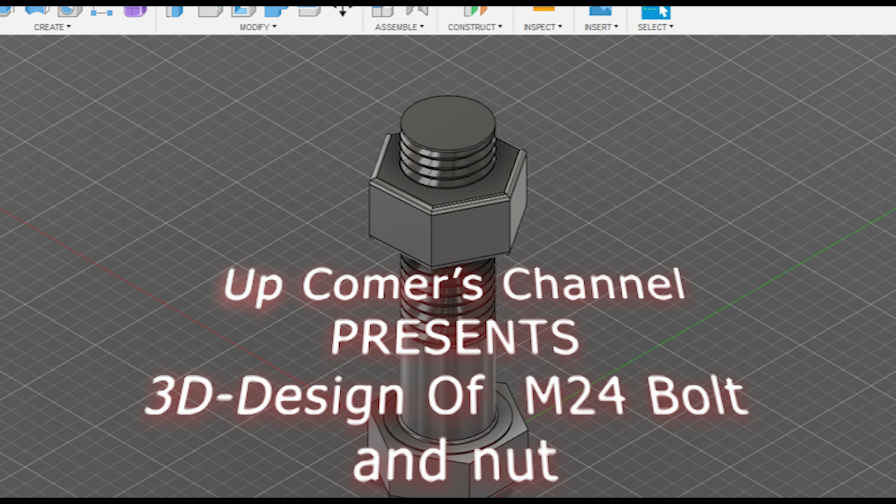Everyone, today we are going to design M24 bolt and nut. First open your Autodesk Fusion 360.

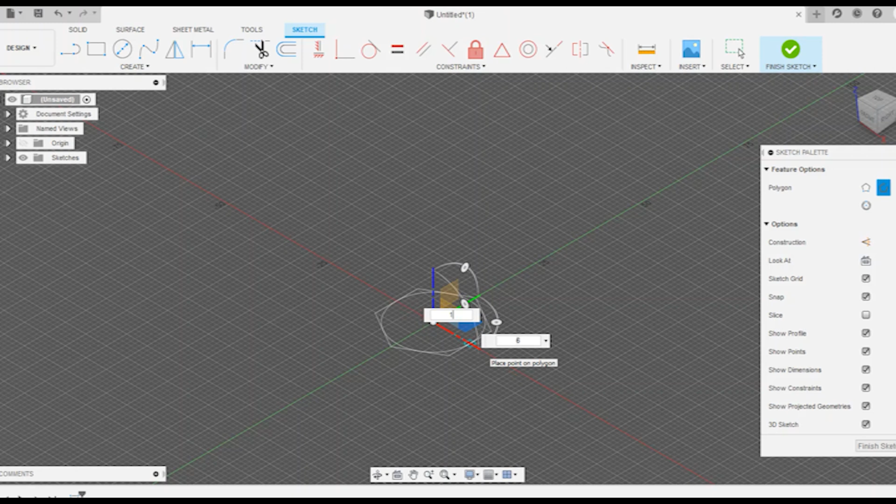Create sketch and click on create polygon, circumscribed polygon. Give radius around 18 mm so that it forms a diameter of 36 mm. Finish sketch and give extrude to around 15.22 mm.

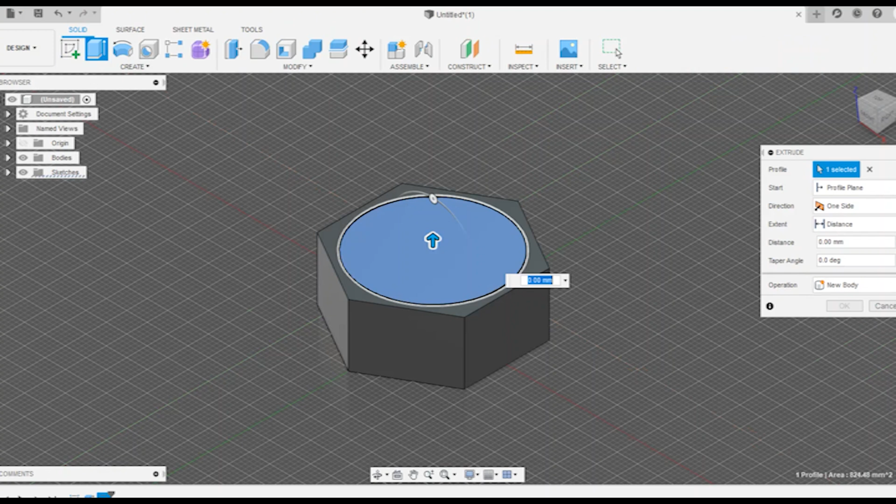Again select the upper plane and draw a circle of diameter around 32.4 mm. Then click on finish sketch and extrude it to around 0.5 mm.

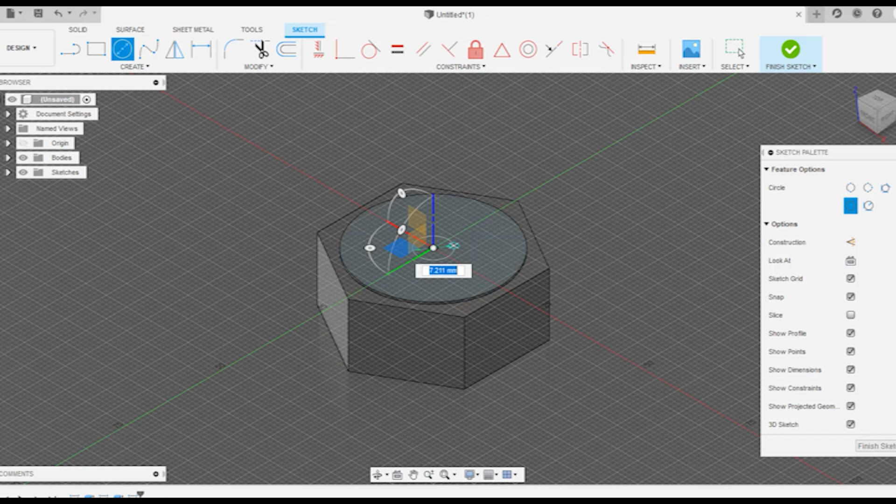Then click on the same plane and create sketch once again and click on the circle to draw the diameter of the shaft. The diameter of the shaft is going to be 24 mm. Just click on finish sketch and extrude again to the length, which can be given around 70 to 120 mm. I am choosing 90 mm here.

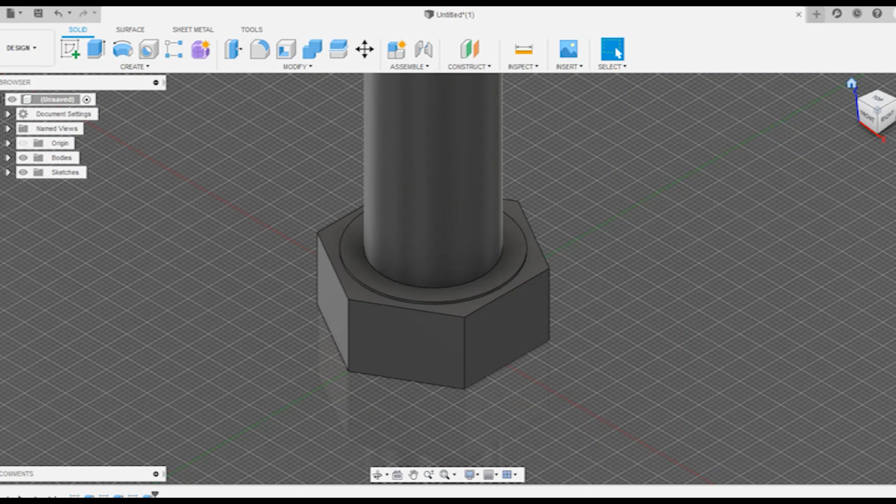We just try to extend the length. You can give any length, but it should be around 70 to 120 mm, not more than 120 mm. So I'm giving 90 mm. Then we're going to give thread to the shaft.

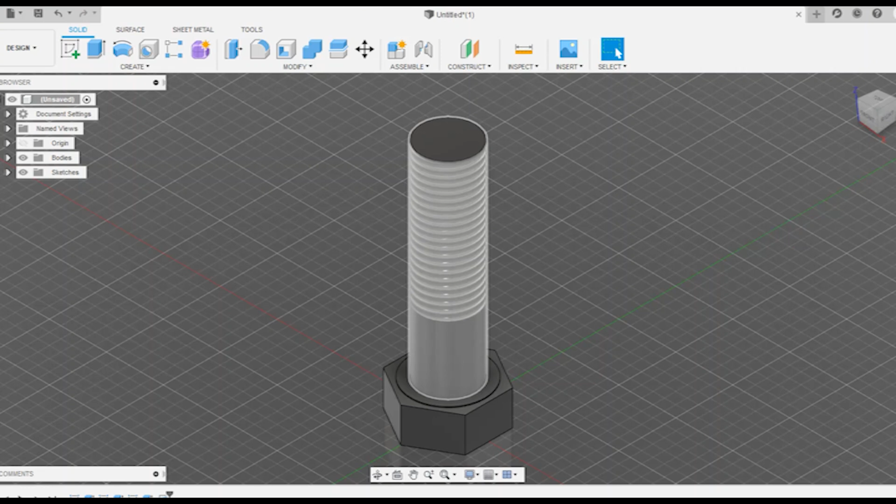It's not the full length we needed, so we just need a specific length, around 60 mm from the edge. Also we don't form the thread from the edge, so we are going to displace the thread around 0.75 mm from the base and click on OK.

I've just got a mistake, it's not completely formed a thread, so I'm once again going to form a thread. By this time you have to click on model and the same steps are going to be followed.

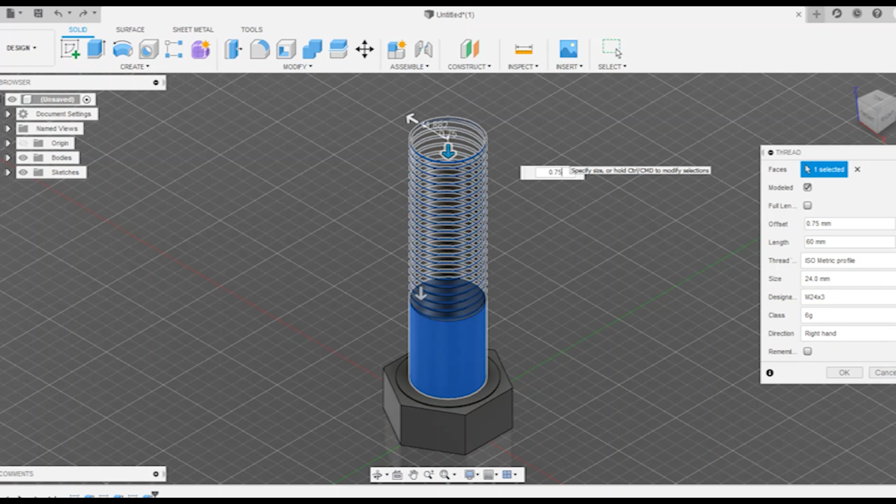Give the length around 60 mm and we are going to displace it to 0.75 mm from the base edge. Then click OK, so that we form the thread on the bolt.

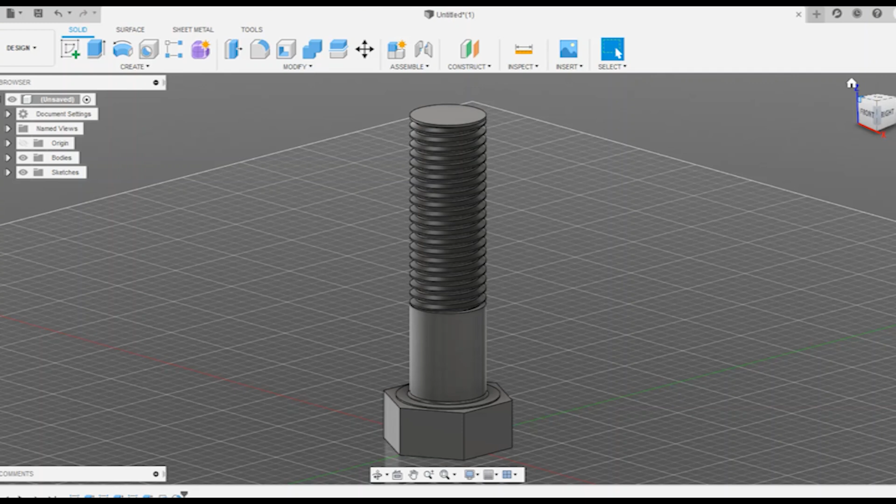Now we need to give some fillet radius to the length of the shaft at the place where we have created the circle. It's going to be 0.8 mm. Then click on OK to give it, and at the top face of the bolt we need to give a fillet radius.

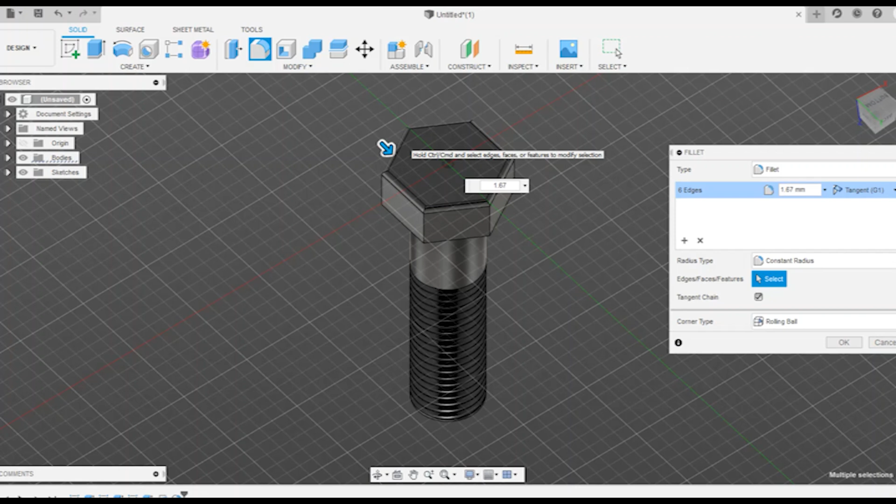So it's going to be around a 30-degree angle. After doing the math calculation, it will be around 1.67 mm fillet radius.

Now we can see that the bolt is just looking like a bolt. These type of bolts are lock nut bolts which is mainly used for assembly.

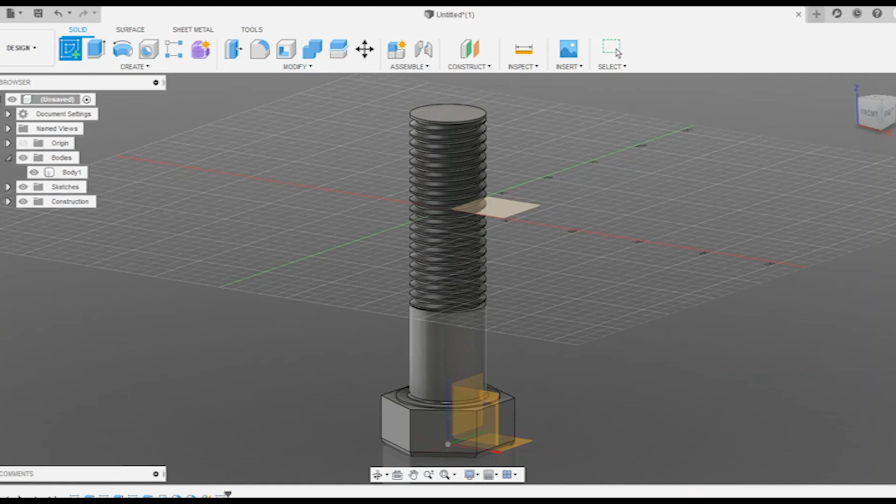Projects. Okay, now we are going to offset the plane to somewhere where you would like to place it, but we need to place that offset plane in the thread. Just the usual method: click on create sketch, choose the plane and draw another circumscribed polygon of the same diameter.

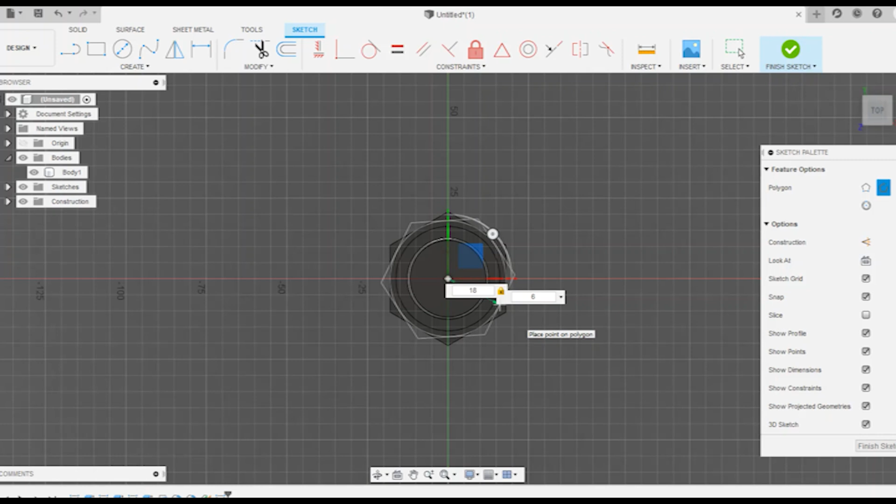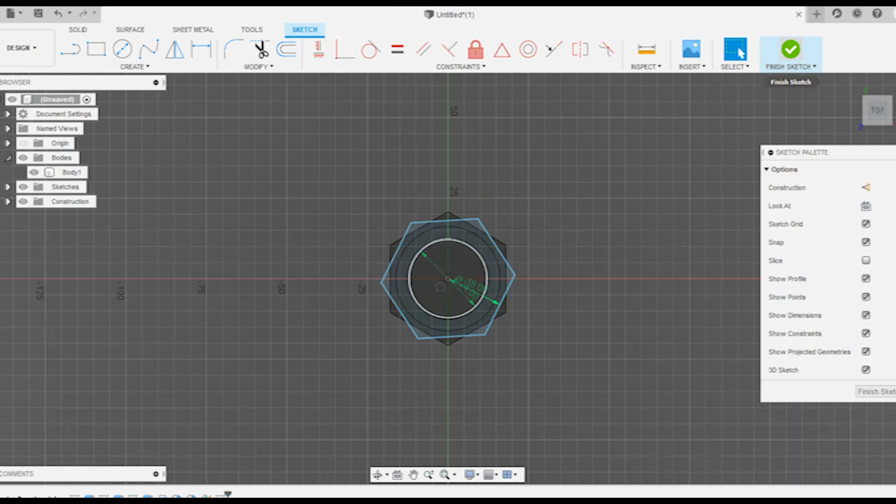So to form a diameter of 36 mm we are going to give 18 mm radius, click finish, click OK. Don't give finish sketch, go to circle and give the radius of the length of the shaft, which is 24 mm. Now you can click finish sketch.

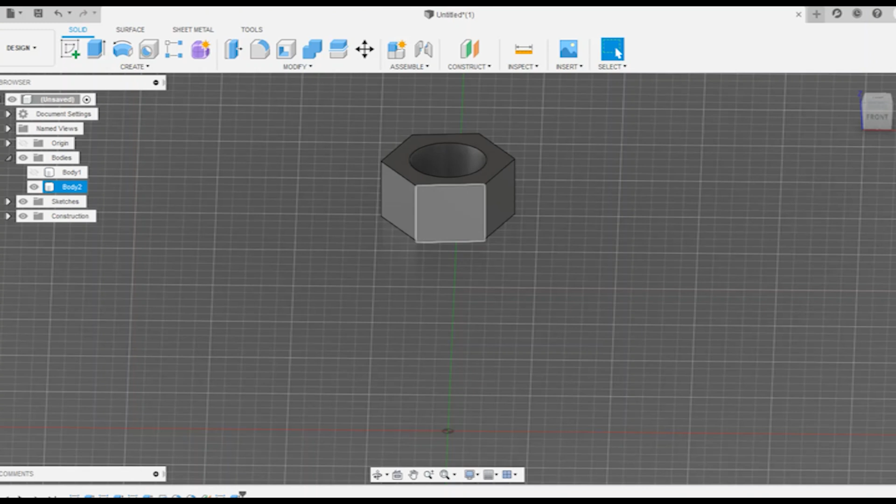It automatically intersects and forms the remaining parts so that you can easily extrude. It's going to be around 19 mm, which is just a nut. If it's going to be a lock nut, then its length is going to be 10 mm only.

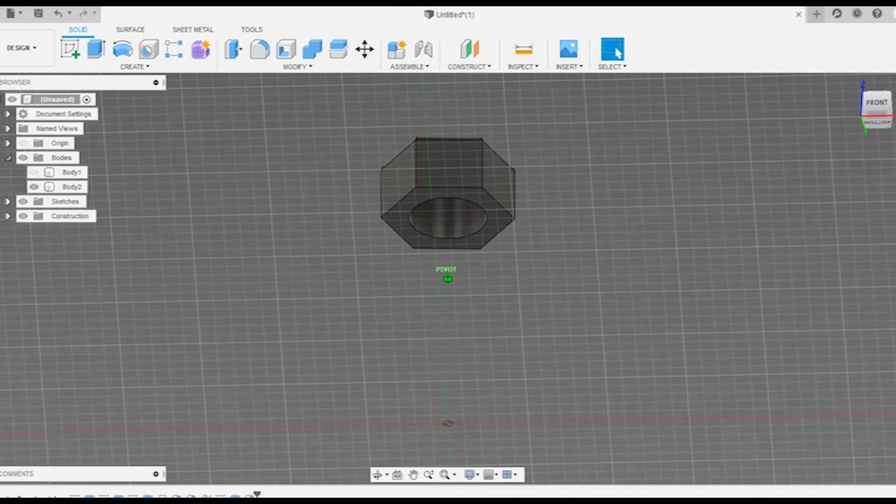We are going to select the edges to give a fillet of around 1.67 mm. On both edges we are going to give the fillet radius.

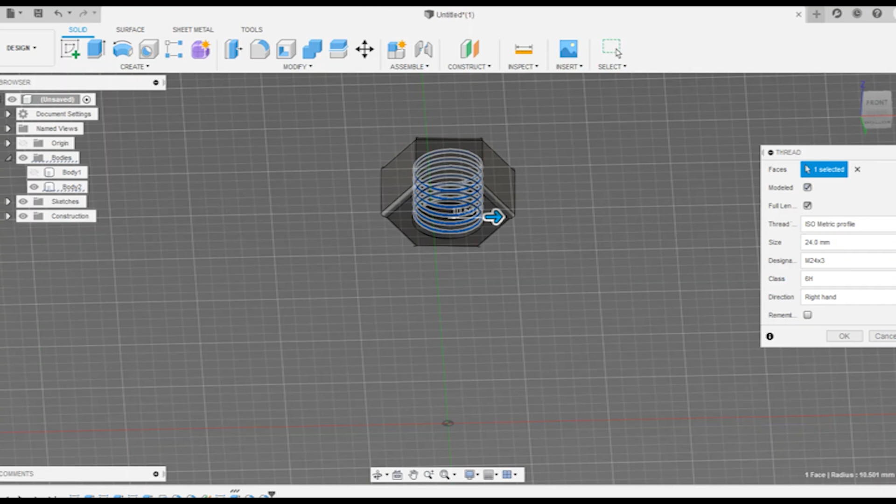We are going to now give thread to the nut. Just click on modeled and click OK. Now the thread has been created in the model.

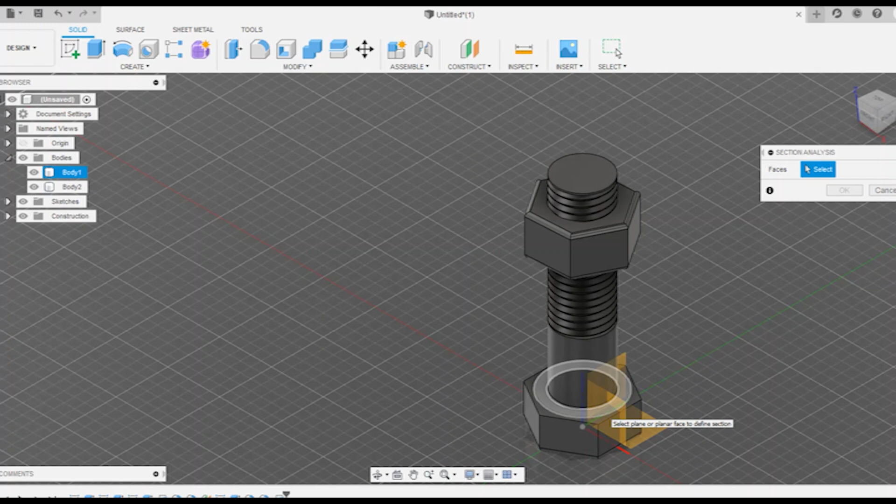Now you can see the complete bolt and nut model. But now we are going to do section analysis so that we can find that the bolt is properly fitted on the nut or vice versa. Just select the plane to which side you are going to section.

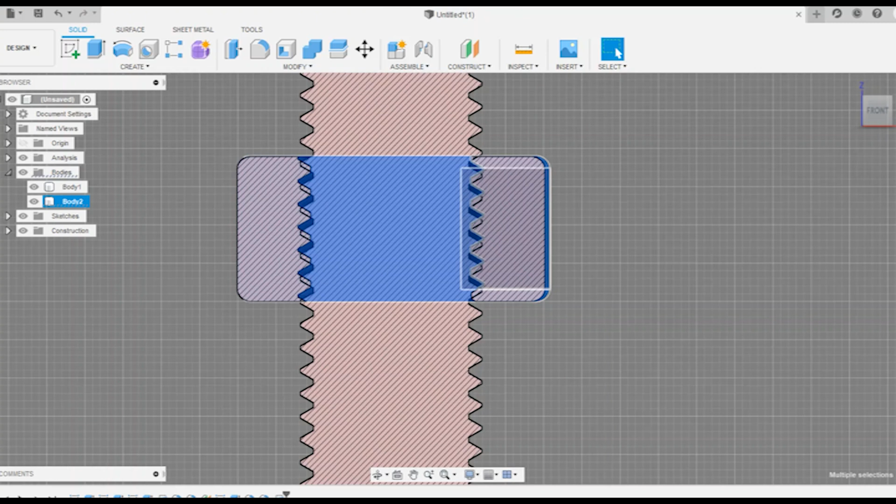And now you can see that the nut is not properly matched with the bolt. So now you can move the nut to match with the bolt.

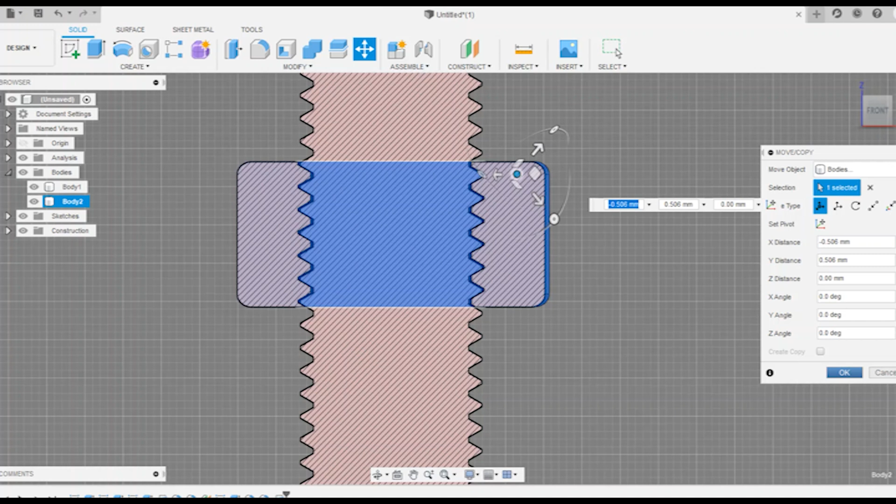Now we can see there is only a little gap. Now it's perfectly matched, and by tapering it with the rotation, there would be no problem in physical. This is virtual, but when it comes to physical, there will be no problem.

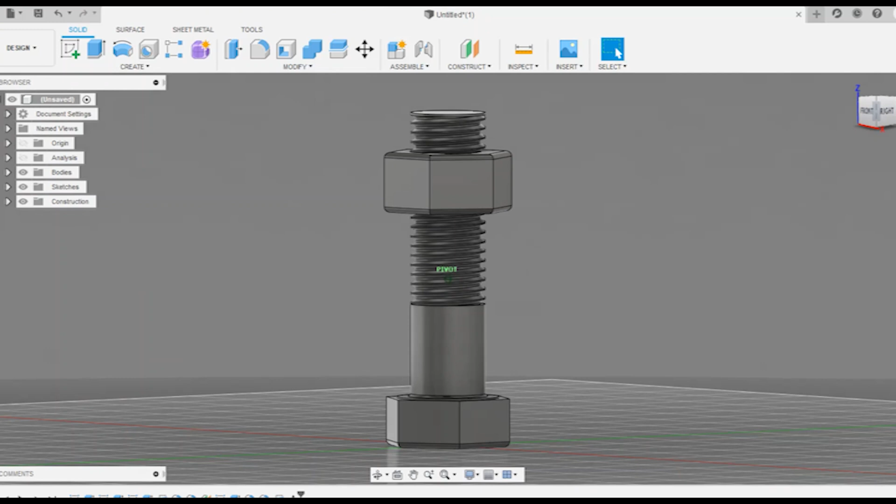Okay, finally we have done our bolt design, bolt and nut. This is M24 bolt and nut, mainly used in assembly parts. Thanks for watching.